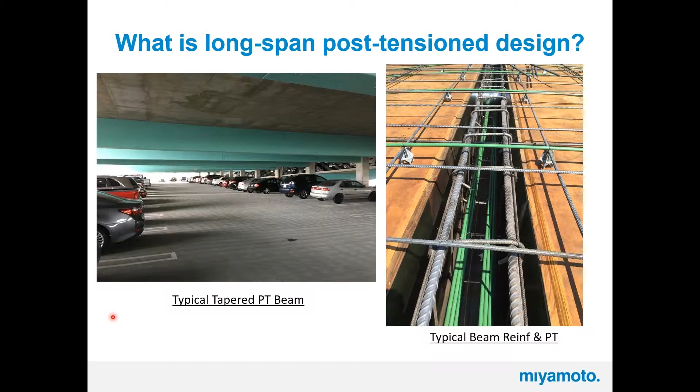So just some typical rules of thumb for this system, the long-span PT beam, is that they are typically right around 62 feet, with a range of 60 to 66 feet. This is based on, you can see in the little architectural image down here, one stall here, then a driveway, and then another stall over here. So that's where this typical 62 foot comes from. And then your beams span from grid C to grid A.

And then this beam spacing is generally in the 17 to 19 foot range, which is two stall widths. These dimensions all vary slightly by jurisdiction. Some of them have an extra inch or an extra 2 inches, so sometimes this becomes like 17.4 or something. Then we have typical gravity columns aligned with each PT beam, each grid, and generally we're using 24 by 24 gravity columns.

So this is the architectural floor plan. Then this is the typical structural framing plan for that same floor plan. So here's our PT beams, roughly at 17 feet on center. And then our 5-inch slab spans 17 feet, and it's one-way PT. These black arrows are our typical slab tendons. We call them out as kips per foot, so we don't call out the spacing. You can kind of do either.

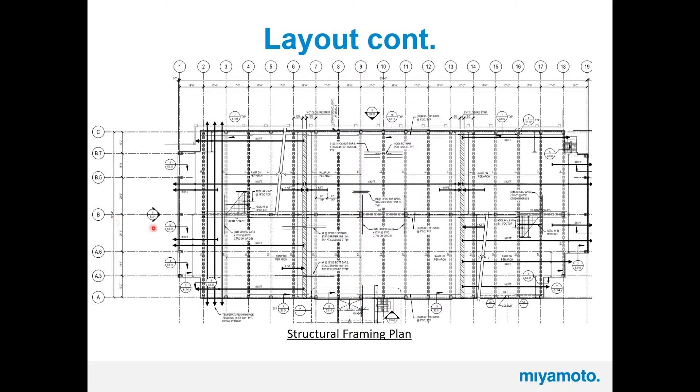And then we have all of our beams labeled B1, B2, B3, B2, B1, and then we have a schedule for all these beams. This is the simple, typical layout, spacing and spans. And then over here, this is 124 or 5, I think. So this is about 62 feet, 62 and a half, which goes with our typical spacing.

And then the loads: we're in California, so we're going off of CBC. The typical garage floor loading is 40 PSF. Some people think it's light, but it's for traffic. That's straight from the code, and it's non-reducible for the floors. There is an exception for members supporting 2 or more floors. So for a transfer girder, columns or footings, you can use a 20% max reduction for your live load. Otherwise, for your floors, you're doing 40, and that's it. You're not doing any reduction.

And then we have these vehicle barriers, those are your 6,000 pound concentrated load. It's kind of like an impact load at 2 feet 3 inches high. So for instance, here's one of your barriers.

And then your floor load is pretty minimal in addition to just the self weight. So you have your 5-inch slab self weight, and then a little bit of piping, and a little bit of miscellaneous. So usually we're adding 2 PSF additional dead load for the slab. Then you have your columns, beams, etc. But for the slab itself, just 2 PSF additional.

And then the simple, easy design, there is 3D software that you can do this. But the simple, easy design is you do one calc for a slab and you do one calc for a beam. And it's all in this ADAPT PT, ADAPT PT RC it's called, and you're using the PT portion of it. So here's kind of the little interface of it, and here's your options: 2-way slab, 1-way slab, or a beam. So for these PT long span parking garages, you're doing one of these and you're doing one of these, and that's the majority of your gravity design. It's just two of them.

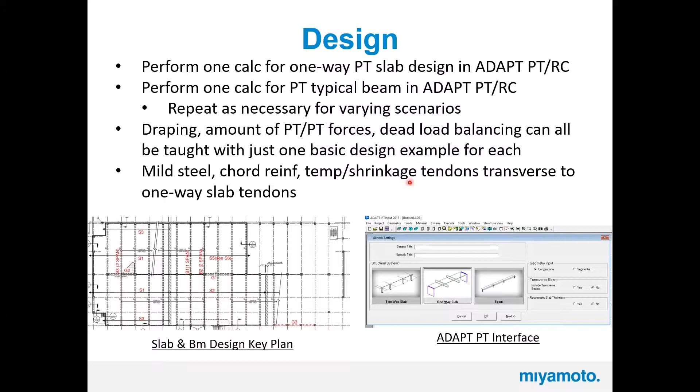And then so we have our typical PT beams that have 12 tendons. They're 1/2-inch diameter, 270 KSI ultimate stress, and then they have a final effective force of 27 kips after some relaxation and friction losses.

And then our PT slab, which you can kind of see in one of our other slides, is usually one of these same exact tendons at 3 feet 4 inches on center. And these are all typical. So after you do your calc, you should be getting this, and the same for the beam. So there's a lot of repetition from one job to the next.

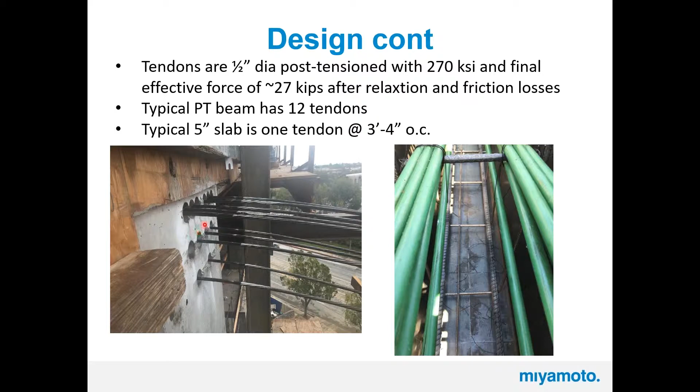The PT force is the total amount of force. So if we have 27 kips per tendon, you could take one of these, 290 or 320, and divide by that 27, and you'll come out to 12 tendons required. So this is kind of how we typically set up.

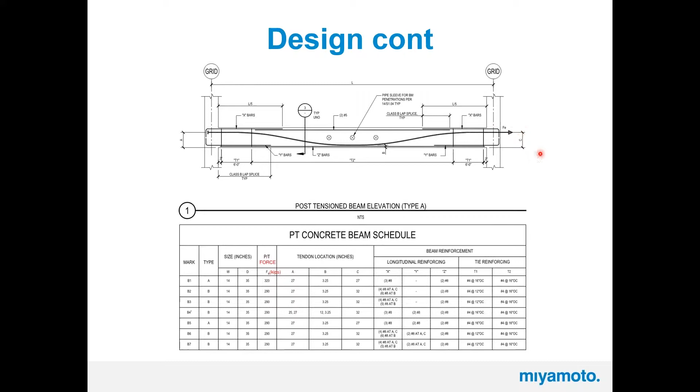And then for California, we're typically looking at moment frames and then sometimes shear walls. I'd say the majority we see are moment frames, but with the shear walls, we have done some studies, and if they can get the shear walls to work, we have found that they are cheaper.

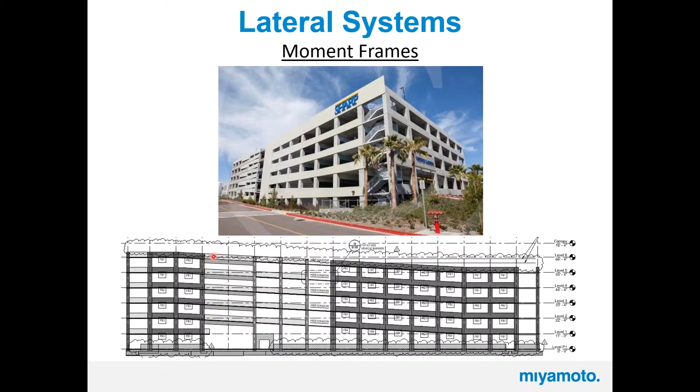So here's a typical moment frame system, and this is our structural elevation, showing all our frame call outs, and then in between here, this is a non-frame section. We just have crash walls here, and then some more frames over here. So we'll do this on each exterior side, and the moment frames are just generally on the exterior of the building.

And so we generally see these on all four sides as well. Sometimes down the middle, and then we're usually putting the shear walls in the middle to help with shrinkage, so everything's not constrained. We do also have pour strips that I'll just touch on briefly; that is to divide up the length of the slab, because you can't tension your tendons over a very, very long length.

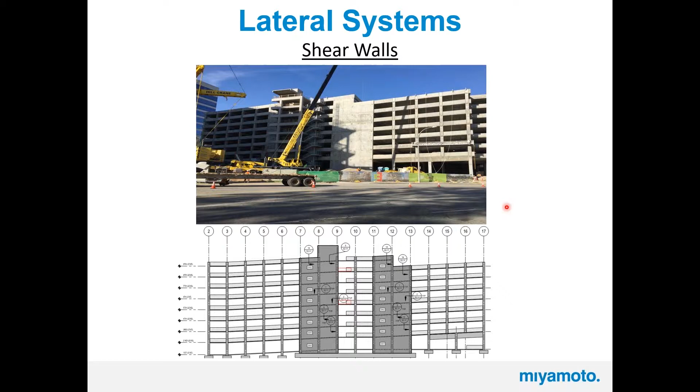I don't know what the rule is. It's 100-something feet, and that's for your losses, your friction and your final effective force losses, and to allow for shrinkage of the slab.

So this other part I was touching on is our typical crash wall when you don't have a moment frame. It's usually just a small 6-inch concrete wall, and it's kind of a little tricky. There's been some debate about this and some articles about developing this. We use a number 3 bar so we can develop it into the slab. This gets thickened a little bit at the edge, so this is actually 7 inches. This is our typical crash wall detail at the ends of the parking structure.

And then these are never connected to the columns. There's always a gap here. That's so there's no force attraction here, and this doesn't rip apart from the wall, or create some kind of captive column.

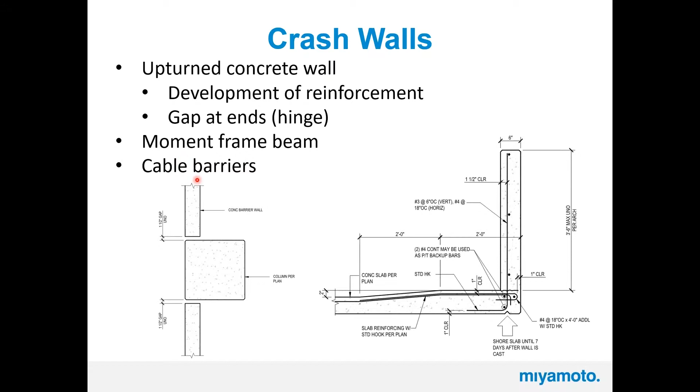Otherwise you can have moment frame beams act as your crash wall, or also cable barriers, and sometimes these are in the interior and these are on the exterior, though the cable barriers can be used anywhere as well. So here's a couple more images of the crash walls, and you can see the joints here at each end. So there's that little gap, so they're not inducing any moment into the crash wall.

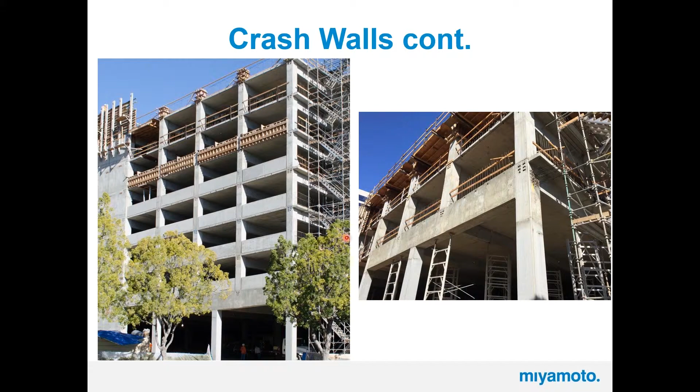And then here's the same elevation, and here's our number 3s at 6 inches on center, and they'll do the little gap on each side. And you can see here's our post-tension strands. Here's actually a transfer girder that we did post-tensioned. And then here's our typical columns, 24-inch square typical columns. And this is a 9-story parking structure.

Then some additional topics. There's some unique non-bearing wall connections where you want some top slip connections, and also each end of the wall not connected, similar to the crash wall. We have some typical details for when it transitions from a slab on grade to a PT slab. And then there are some areas where there's overlapping tendons. We have typical details for that, to say which tendon controls over the other and where it goes, above or below, etc.

Then there's unique load balancing. So for the post-tension slab and beams, where you want to balance a certain amount of the dead load. And there's different values for slab and beams. This is all in literature and some of our design guides too.

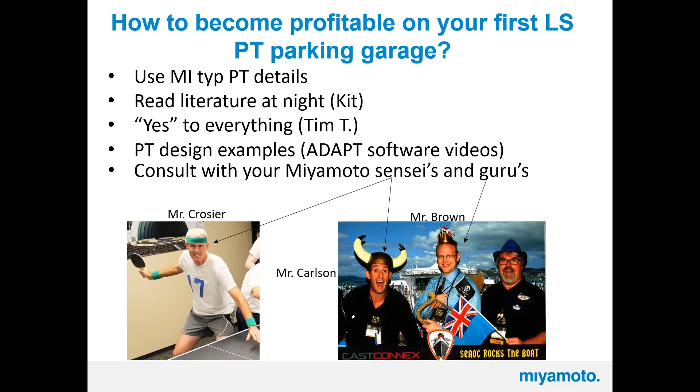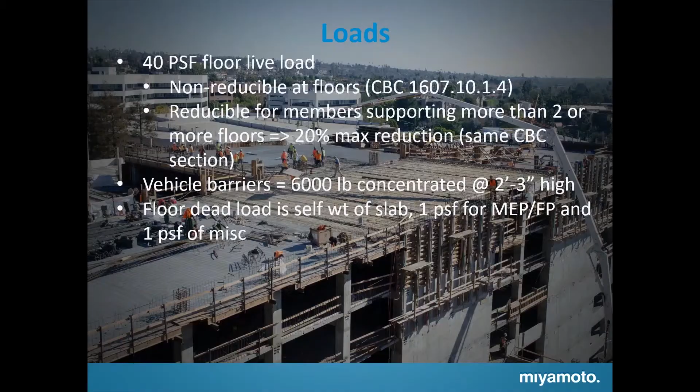Anybody else? Well, Danny, I have one more question, which is, have we ever been asked to go longer span to accommodate tandem parking spaces? The longest one I know about is like 66.5 feet, I think. And that still works with those beam types you were calling Cunningham beams? Yeah, yep. So I think the normal is usually around 62, but we went up to like 66.5 or something. And we did get it to work. We ran into a couple of little small detailing things, but we ironed that out after. Now we know.

Add something on that too. When you get up to 66 feet, you can still use the Cunninghams, but John, I think you were saying 12 tendons. When you start getting up to like 66, it's getting to like 16 tendons. So it starts getting really crowded really fast if you go any higher than that. Is there a larger form of preformed beam, or do you have to go to custom PT beams at that point that use custom formwork? I think we would still use the standard beam size for that 66 foot. Otherwise, you lose all your cost savings, I would think.